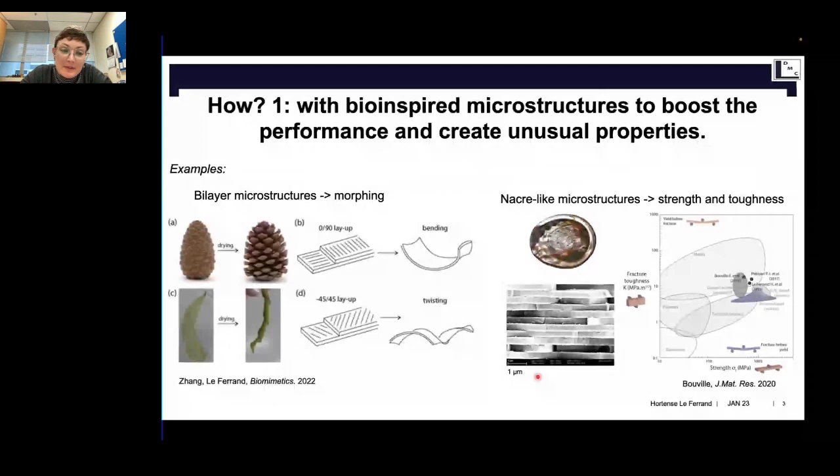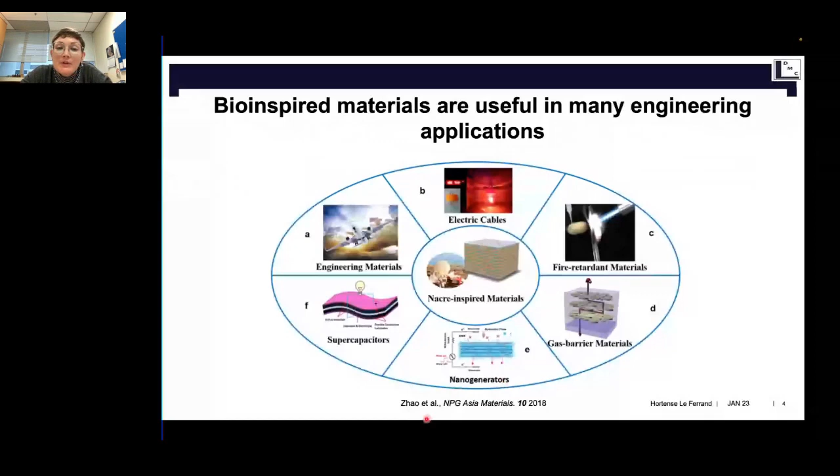But I like to pose the question, can we increase their complexity? So nacre-like is like a wall with a brick and mortar structure, but can we make it even more complex? Can we make more functionality? And can we make these kinds of materials ready to be produced in larger numbers? And so this comes the second key point of this vision I want to share with you, which is that we can use 3D printing to combine the high performance and the multiple functions.

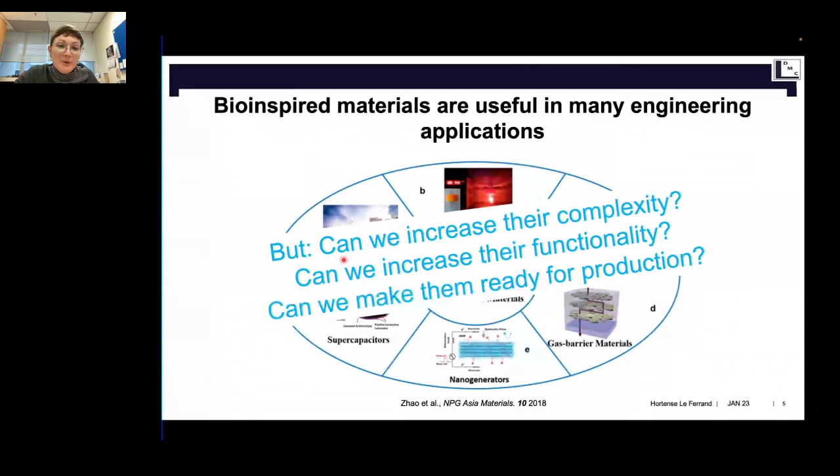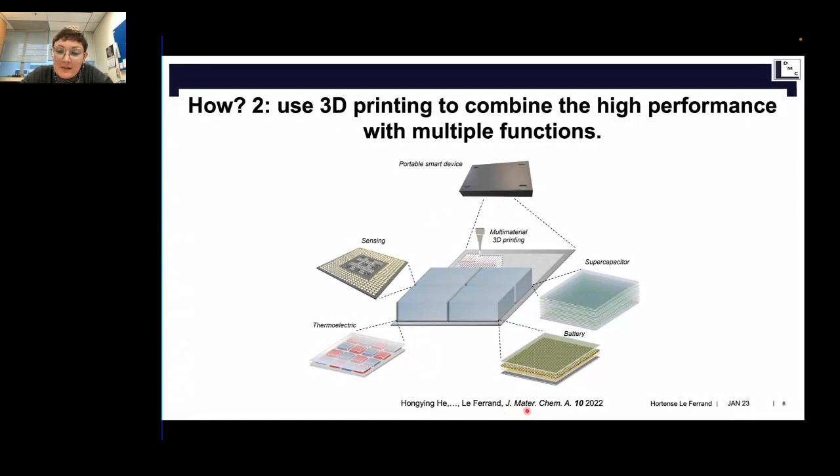So imagine in the future, we want a very small portable smart device. So we could imagine 3D printing directly the different components next to each other, or on top of each other, or entangled within each other, like a supercapacitor. There could be a battery, thermoelectric materials, sensing functions, and so on. So this is more detailed in this paper we wrote in the Journal of Materials Chemistry A last year.

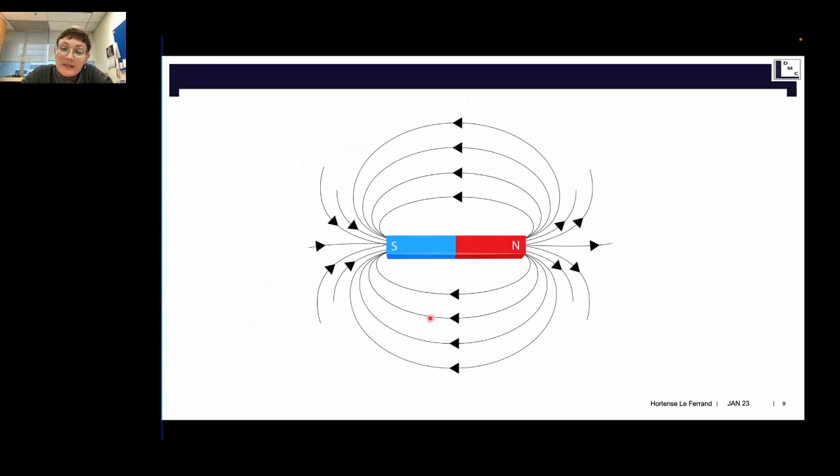So to sum up, the way we want to make these small centimeter-sized devices is by using bio-inspired microstructure and 3D printing. So how are we going to create these bio-inspired microstructures? Throughout this talk, I will talk about magnetic fields from magnets as the tool we use to create this bio-inspired microstructure. So we use an external magnetic field. And more specifically, what we use is a rotating magnetic field.

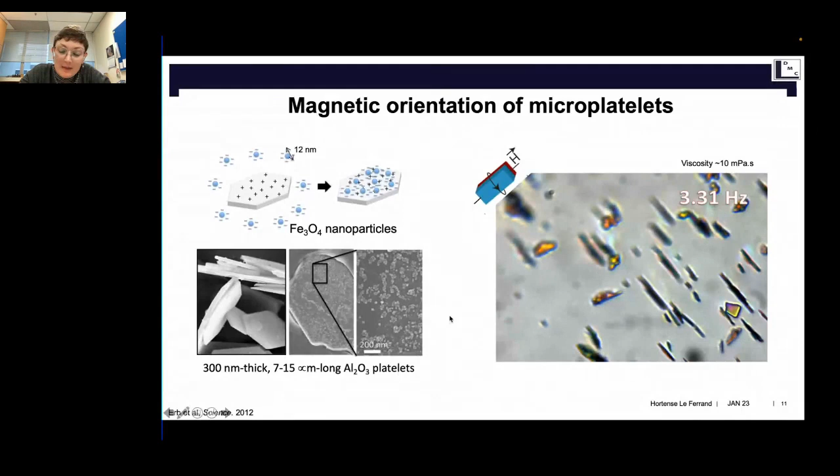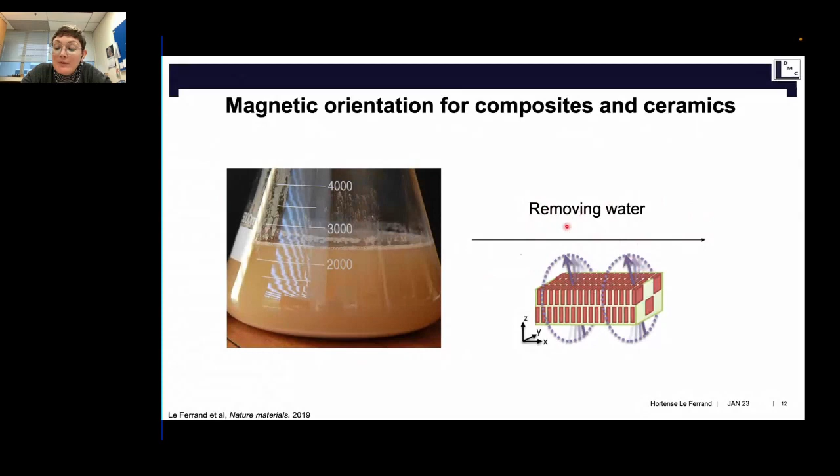Now this is in liquid, so if we want to make a composite or a ceramic with this, we need to start with a suspension, align it, and at the same time remove the water. So this is what we do. But to do this, we need to design our suspension, which is here, in a smart way, which I will explain now.

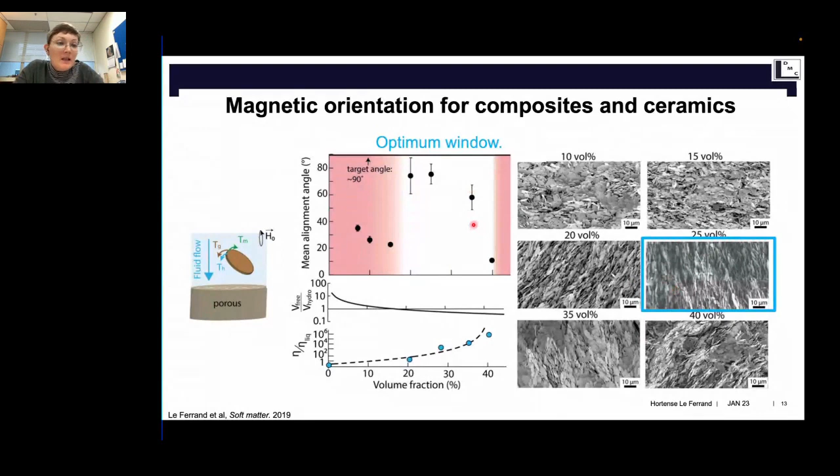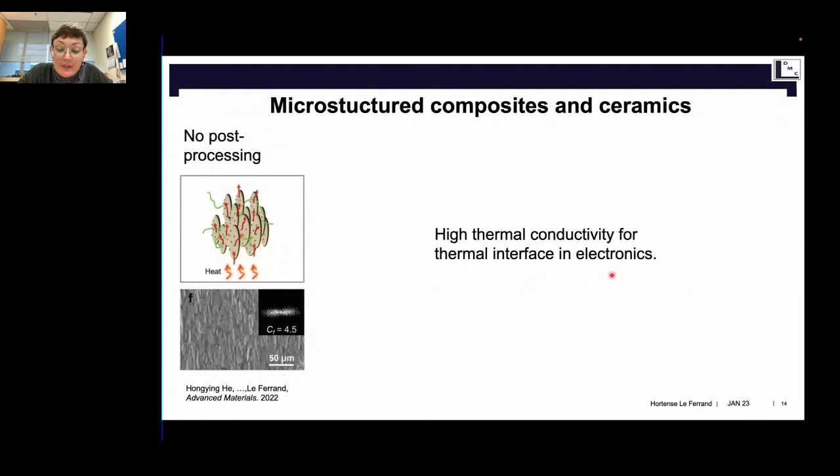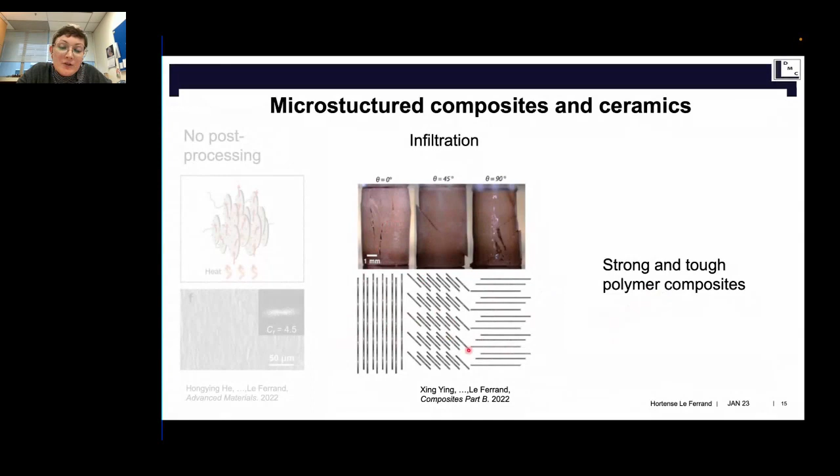Okay, so now we have our microstructures aligned. So how do we turn it into a composite and a ceramic? Either you use it as such without post-processing and you get a material. So here we did that using boron nitride platelets to make high thermal conductive materials for electronics. You can also infiltrate it, and then you can make strong and tough polymer composites. So here we varied the orientation and showed that, well, the nacre-like is indeed the toughest.

Or you can bring it into a furnace, sinter it, and transform it into a ceramic. So these samples here were sintered at high temperature, but also hot pressed. So you apply pressure at the same time as the temperature. And this leads to ceramics that are very difficult to break. So this is what we call tough nacre-like ceramics.

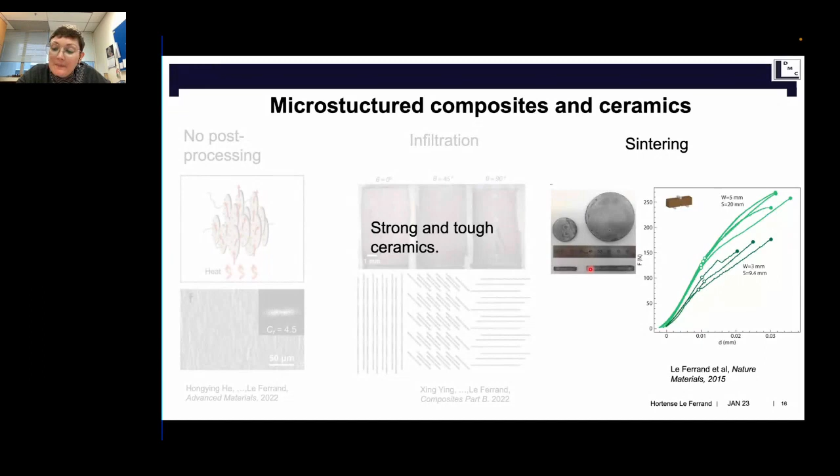And we can make even more complex microstructures if we modify the orientation of the magnet as the sample is dried. So basically, as long as the sample is a little bit wet and as long as the platelets have space to move, they will be able to align with your magnetic field. Once it is dried or once it's too concentrated, they will get stuck in their orientation. So this is what we applied to create this kind of 0-90 periodic orientations or to smoothly vary the tilting of the platelets.

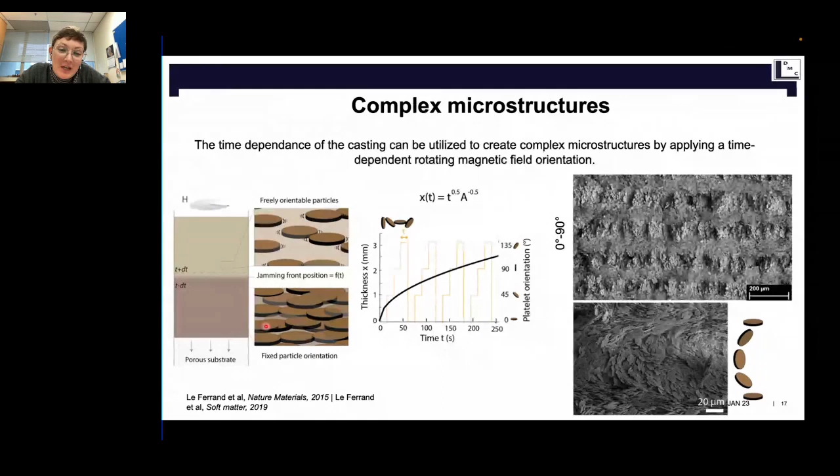And yeah, so this is one last sample by one of my staff, Xing Ying. She made this beautiful structure, which really looks like a seashell, where we have multiple orientations and it changes within the plane. So this is nice. So we have a tool to make microstructure, but now you're going to ask me how to make an object out of these materials. And that's where 3D printing comes in, of course.

So I want to introduce, since I have a bit of time, two methods that we recently developed where we can 3D print these materials. These are slightly different methods that are also complementary. The first one is called magnetic drop on demand, which was developed by my former postdoc, Liu Wing Chung. You can find the work in Nature Communications, and it's also patented.

So here are some SEM images to show the control. This is a vertical structure where we varied the angle, made with an ink containing the same aluminum oxide platelets as I showed in the part on the microstructuring. So you can see we can really tune the angle as we desire. And we can do it vertically, although we have to take into account that there are some deformations at the interfaces.

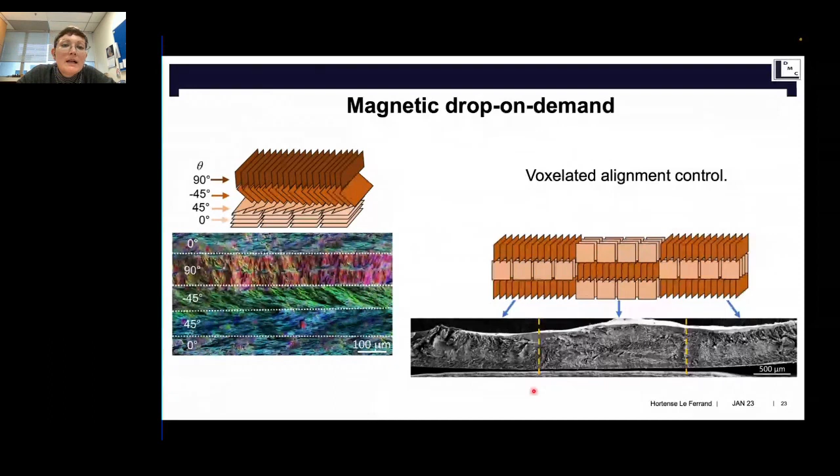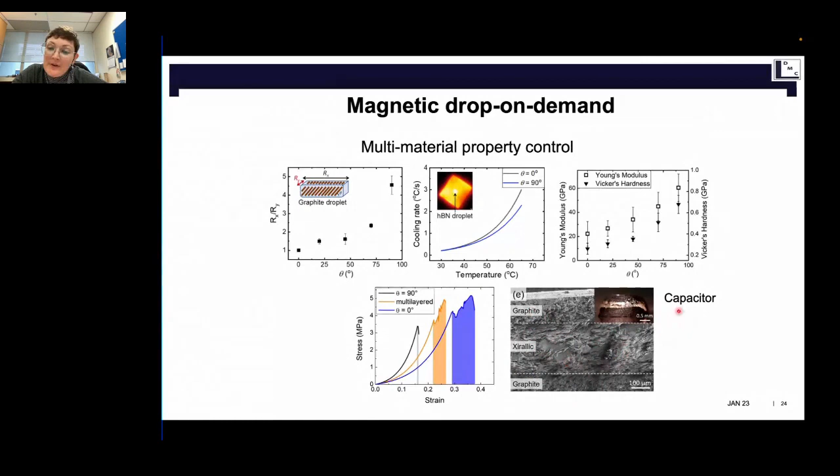And the last multi-material property control I want to show is we can also combine different materials together to build functional devices like a capacitor. So this is graphite, aluminum oxide, graphite, and we also measured that if you vary the orientation of the middle layer, you would vary the capacitance of this capacitor.

So as an example of a smart device that we can build with this, I show here a self-cooling mechanical sensor with tailored sensitivity. So this is how it looks macroscopically. You can print several together at the same time by depositing all these drops. And the design was to have a graphite pillar with vertical or controlled orientation and do this on a slightly larger boron nitride surface, so that the boron nitride will do the cooling when the sensor is working, because you need to have an electric field throughout the sample to measure the deformation.

And so it's a mechanical sensor. What we do is we apply pressure on it, and then you measure a variation in the resistance. And the design comes in handy because when you control the angles of the graphite in this sensor, so I'm coming to this plot here, you can tune the sensitivity of this sensor. If you have only vertical, it's not going to be very sensitive, but you can apply high pressure. If it's only horizontal, it's linear only at the beginning, and then you cannot apply very high pressure because then it's not linear. But if you have mixed orientations inside this pillar, you can extend the range where it's linear towards higher pressures.

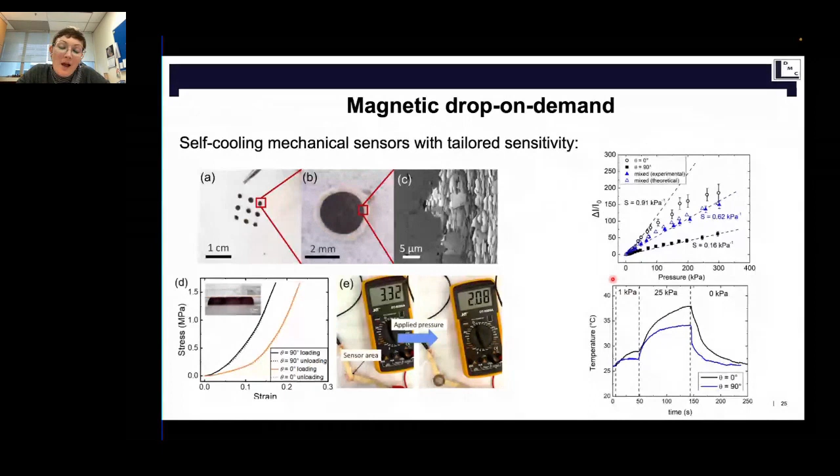And this is quite useful for making a sensor that has a controllable response. And at the same time, we can cool it during operation thanks to the boron nitride, so that we don't risk any overheating or short circuits because of the heat problem. So that's one example that we can do with this method. I'm sure there are many.

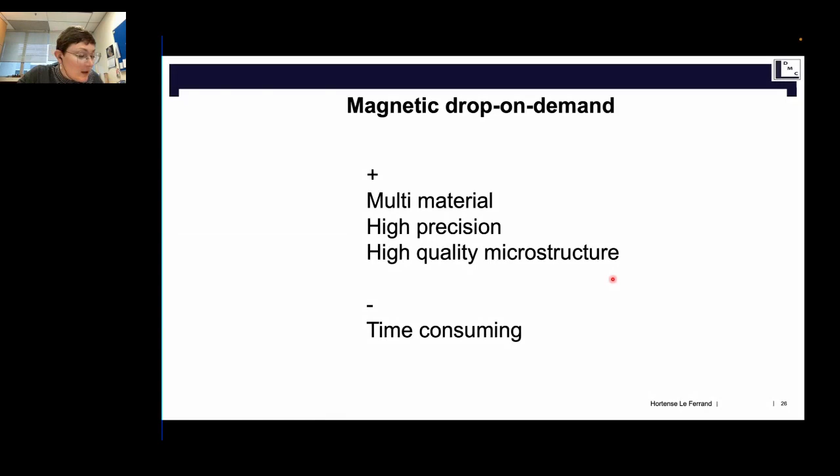So the advantage of this magnetic drop on demand is that it's multi-material, it's high precision, you have a high quality of the microstructure. One problem, however, is that it's a bit time consuming, because if you remember, we need to wait for these platelets to sediment and to dry. So this motivated this second technique, which is continuous magnetic direct writing.

So here the principle is to make an ink that we extrude directly, and while we extrude it, we align the platelets that are inside this ink, and at the same time we print on a slightly porous substrate that will dry and fix the microplatelets in their orientation.

So here we had to optimize one thing: the time to align the platelets should be shorter than the time for printing, because this guy is going to move forward, right? And the time for jamming. So we need to control to make sure we have these kinds of relations.

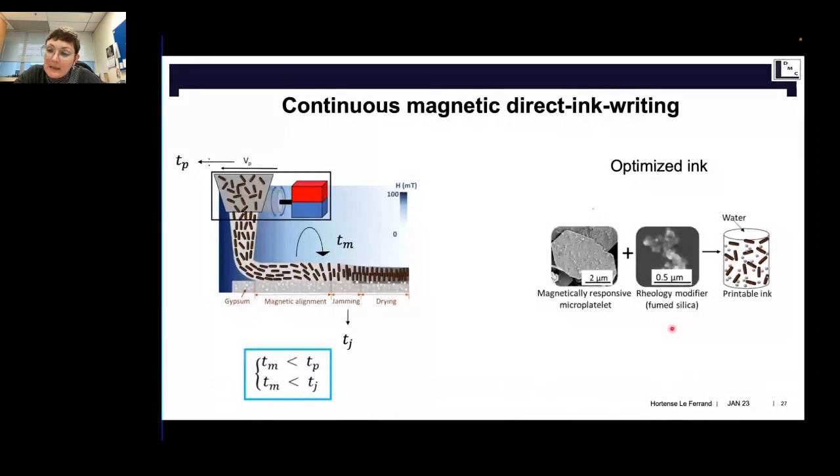And to do this, we developed an optimized ink that contains magnetically responsive microplatelets, so the same as before, but we added fumed silica as a rheological modifier to make the printable ink. So here I already directly show you some of the microstructure we can get. So you can basically orient the platelets as you want within one 3D printed filament. You can make, of course, multiple filaments, but the unique capability is the orientation within one filament, as illustrated here.

And so what kind of material can we print with this? I will show you two examples. The first one is with ink containing aluminum oxide platelets, where we can make strong and magnetic ceramics. So we print and then we sinter at a high temperature. We can make small objects, as you can appreciate on this image. We can make porous objects as well.

These objects are usually magnetic because we have to add a lot of iron oxide in our ink. So they will stick to a magnet, and the mechanical properties are anisotropic and are fairly reasonable for a ceramic. So yeah, rather high strength and high flexural.

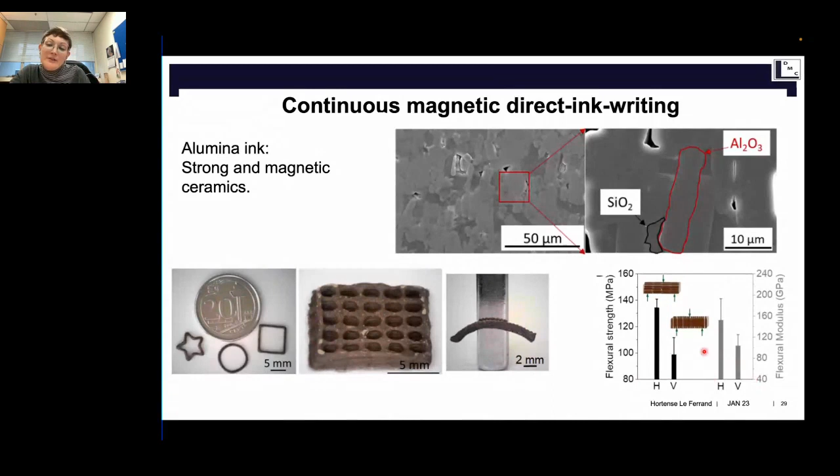The second application is using the same method, but instead of using alumina, we use graphite. And here we can make strong, magnetic and electrically conductive materials with the same quality of microstructure control, as you can appreciate here, of shapes. The materials are also magnetic, but they are also electrically conductive after a reduction at 1050 degrees.

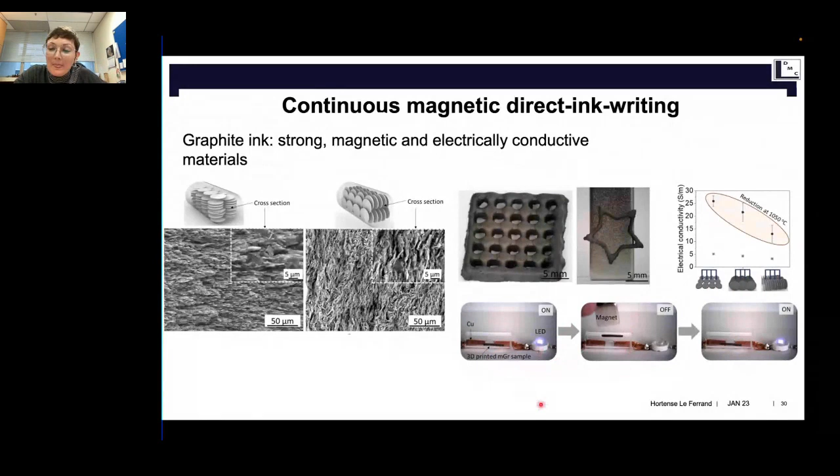So what kind of device can we make with this? So we can think of different applications. Here we illustrated it by making a kind of electrical cable that you can remotely remove or orient using a magnetic field, like a remote controllable switch. So in short, our 3D printing methods allow us to locally design objects to boost their performance and combine functionalities.

Future work, the question is, which design should we use? How to design this microstructure, how to design this complex material. So for this, stay tuned. We are still, of course, developing these methods.